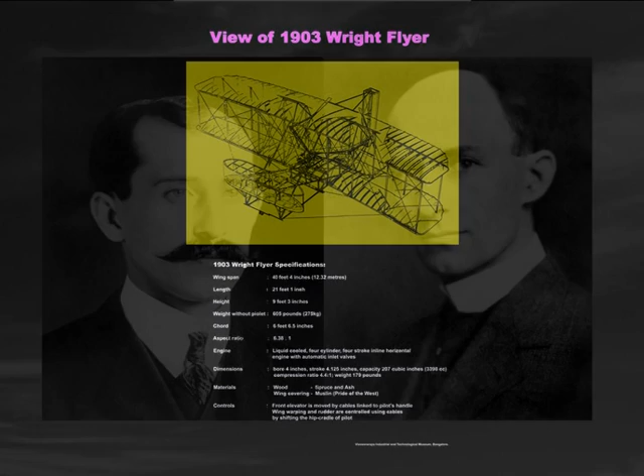Wilbur Wright and Orville Wright, two brothers, were ready to test their heavier-than-air plane, the Flyer, on this momentous day. It was the first powered airplane that would attempt to fly under the control of a pilot, who was to lie on his stomach as he steered the flight. Would it fly? Would it not?

It was a windy day in North Carolina. At 10:35 in the morning, the Flyer rose. It went up to 120 feet and flew for 12 seconds. With these 12 seconds, the Wright brothers had fulfilled man's desire to fly. It was the first controlled, mechanical, and powered flight.

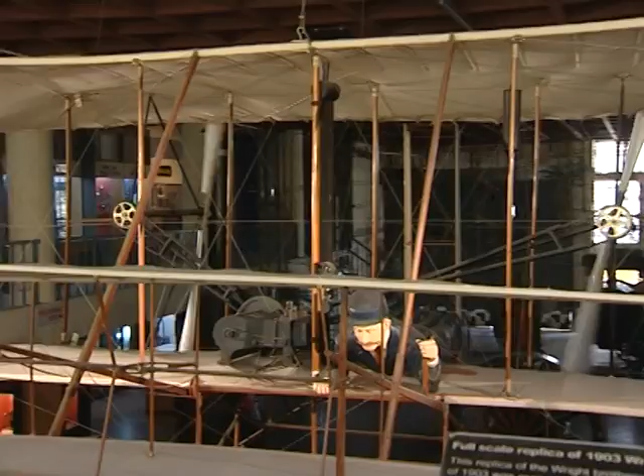100 years later, in 2003, the Visvesvaraya Industrial and Technological Museum in Bengaluru unveiled a full-scale replica of the Flyer. Displayed at the Engine Hall, this is the only one of its kind in the country. It's a piece of history, a display that fascinates and takes one back in time. Everything in the model is authentic.

A 15-member team worked for 9 long months to craft this masterpiece. The Wright Flyer had been handmade by the Wright brothers. In its simplicity lay the biggest challenge.

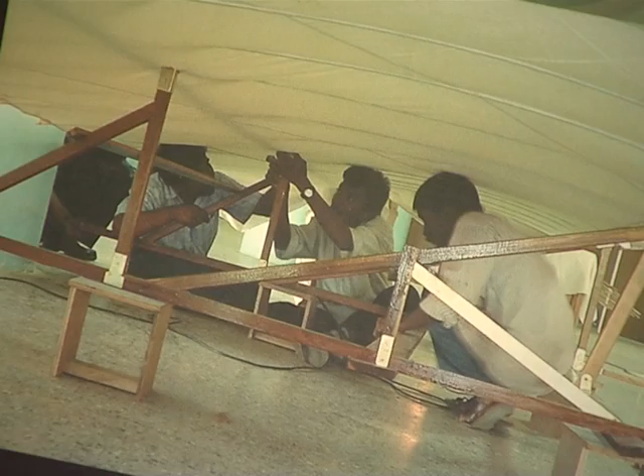60 cubic feet of wood, 400 meters of steel wire, and 170 meters of cloth was used. All material as close as possible to the original, except the engine. A set of 50 authentic drawings from the Smithsonian Institute guided the venture, drawings that had been made after dismantling the original Flyer. The National Aerospace Laboratories, Bengaluru, provided the technical guidance.

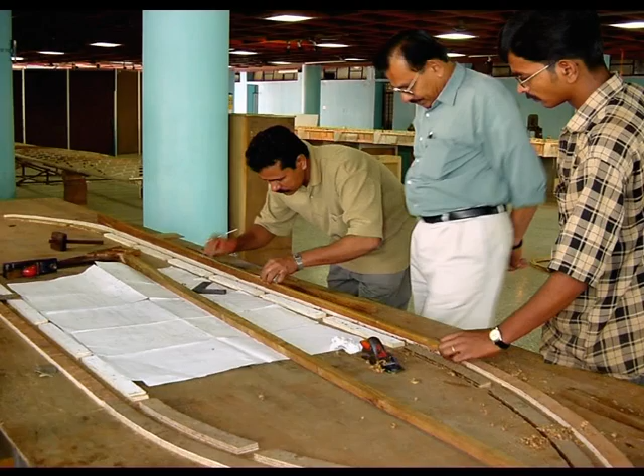The Flyer replica is a tribute to the Wright brothers. VITM presents the story of the Wright brothers, the story of perseverance and brilliance, the story of an invention that changed our world. Here is the story and the history of flight.

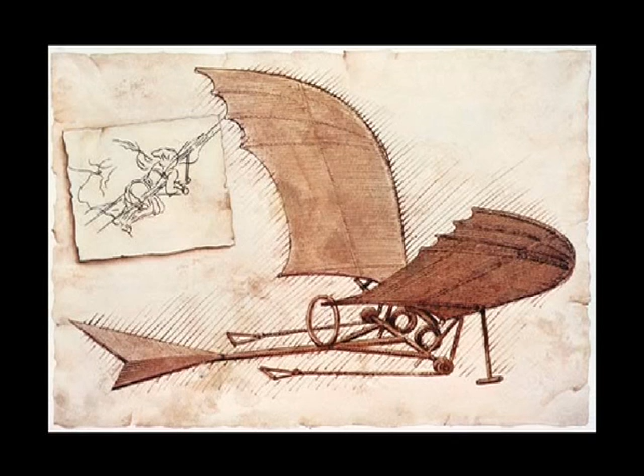Some 500 years ago, 15th century artist and inventor Leonardo da Vinci sketched his flying machine, the Ornithopter. Leonardo thought of birds as machines that operated according to mathematical law. He believed that whatever occurs in nature can also occur in technology. The bird-like wing-flapping aircraft was never tested.

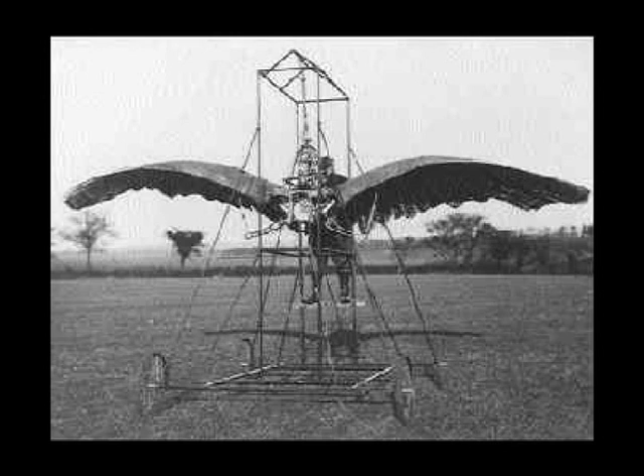Manned flight continued to fascinate, but it evaded man. Kites led to balloons. They could float in the air, even carry weight, but they were balloons, rooted to the ground. Experiments continued. Gliders followed.

George Cayley, a British inventor, designed the first ever model glider. But gliders lacked power. They glided from the top to the bottom.

In Germany lived an exemplary innovator. Otto Lilienthal dreamt of flight too. He believed to invent an airplane is nothing. To build one is something, but to fly is everything.

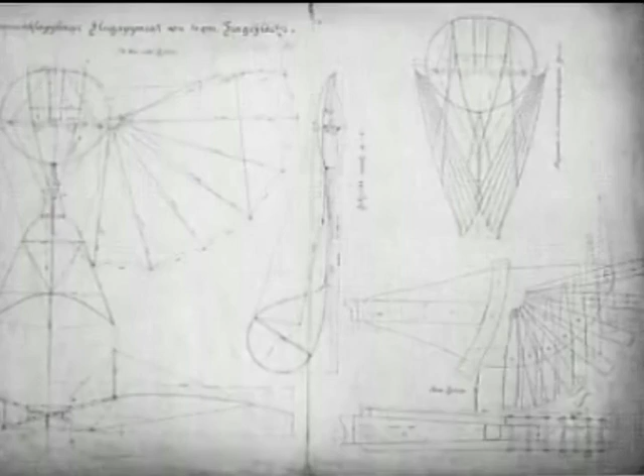Otto Lilienthal started working on gliders systematically. He was able to make sustained and replicable flights for the first time in history. He devised 18 different designs of gliders in a short span of 5 years. 15 were monoplanes and 3 biplanes. He went on to become the first man to launch himself into air, fly, and land safely.

Lilienthal's contribution to flight was exemplary. He died in an accidental crash, but he did 2 important things. He proved that the mastery of flight should first be in gliders. And secondly, he became the inspiration for the Wright brothers.

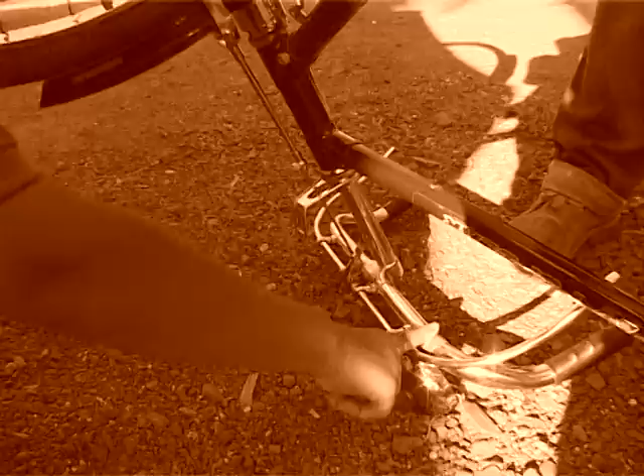The Wright brothers in America shared his dream of flight. They learned from his successes and failures. They had a mechanical bent of mind. They were also very curious. The brothers were a good team.

They flew kites like all children their age, but unlike others, they keenly observed them, learnt from them, even designed them. They delighted in the flight of birds. Why, you may ask? Why fly? Only because of one simple reason. The gift. It could actually fly.

When the Wright brothers were little boys, their father gifted them a toy that could fly in the air. It fascinated them. It was the toy that fired their imagination. They called their father's gift the bat. Powered by a rubber band, the little toy flew. The brothers reasoned, if this can fly, so can an improved, heavier design. Their dream was born.

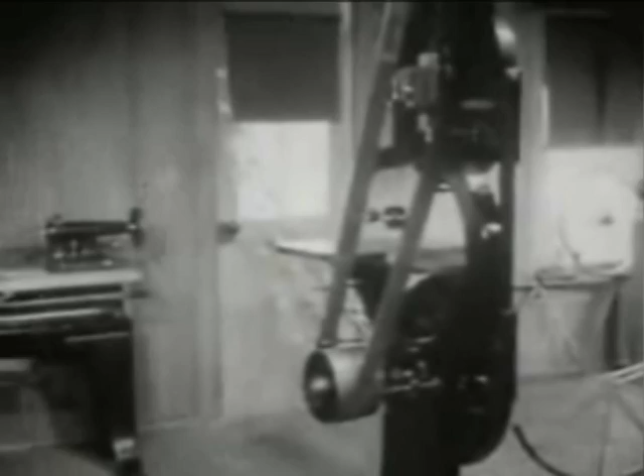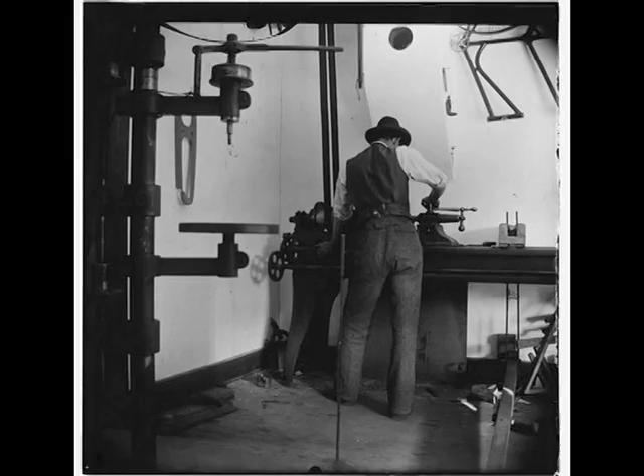Inspired and motivated by the work of Otto Lilienthal, the Wright brothers started understanding aerodynamics. They worked in their bicycle factory, made it into a workshop, studied wing shapes. They mastered aerodynamics. The Wright brothers understood the airfoil afresh.

How it curved like a bird's wing. Wasn't that nature's perfect design to create the upward force? So what's special about this shape? The airfoil makes the wind flow faster on top, causing an upward force, lift. There is an added lift due to the air deflected downward. Both these forces together provide the lift required to rise and float in air.

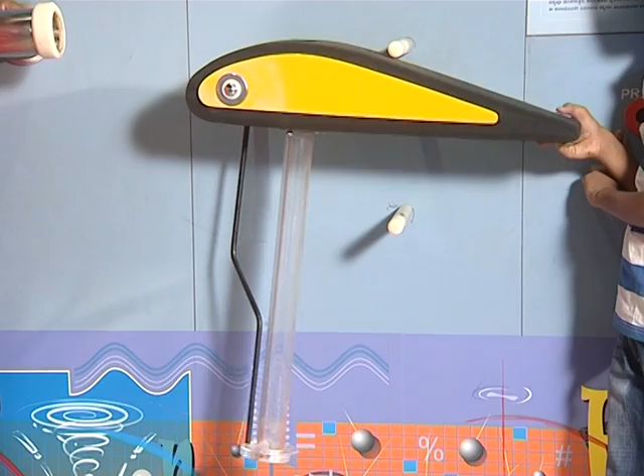Have a look at the airfoil shaped wing. Air flows from a pipe onto the wing. Watch the ball. It climbs due to a low pressure created by the faster airflow on top. Block the flow and the ball drops. The Wright brothers had understood the aerodynamic forces on curved surfaces, the forces that could make their dream come true.

They approached flight with 3 clear goals. Lift, to make the heavier than air plane rise. Control, the ability to steer and direct. And thrust, the power to make it move ahead.

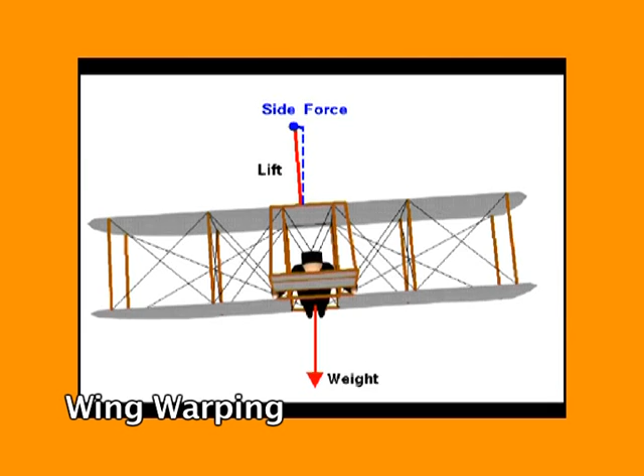It was a 5-foot box kite shaped like a biplane, a glider that could be flown as a kite. The Wrights wanted to master lift, balance and control. They wanted to understand the effect of wing warping. Warping means twisting. The Wright brothers understood that when the wings were twisted or warped, the glider could turn. They understood that the lift force on the wings could be changed by lowering or raising them. The glider, they noticed, turned in the direction of the lower end.

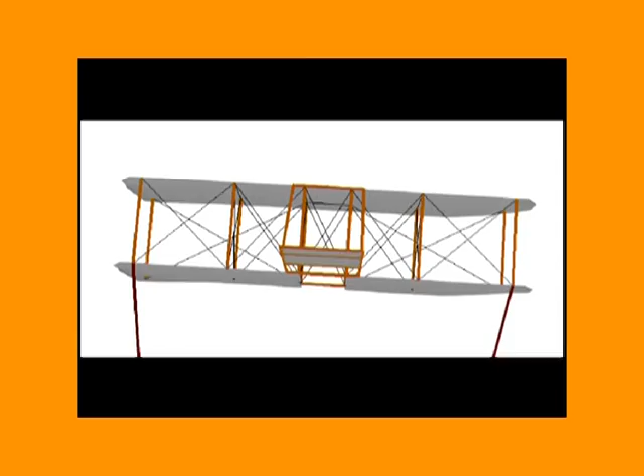It was something like this. Notice how the parasailer controls his flight. He directs it by pulling the strings attached to the sails. When he pulls right, he turns right towards the lower end.

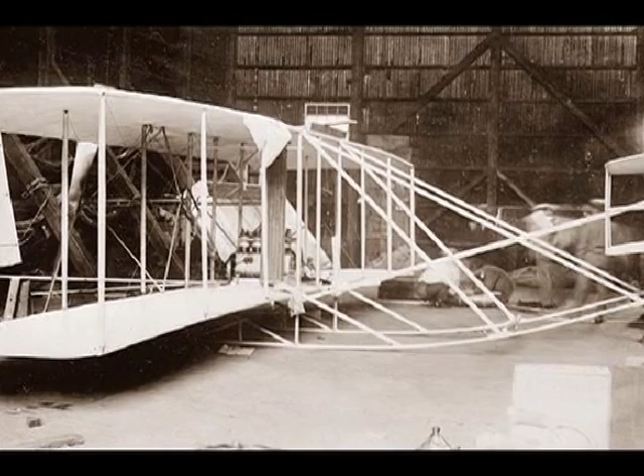The Wright brothers understood lift and warping with their box kite. They grasped, faster the wind movement, greater the lift.

Something that we can understand with a simple model. A string through a straw to give it free movement. A wing-shaped airfoil made with card paper. And a hairdryer for airflow. Notice how the wing remains suspended in air. It has lift strong enough to defy gravity.

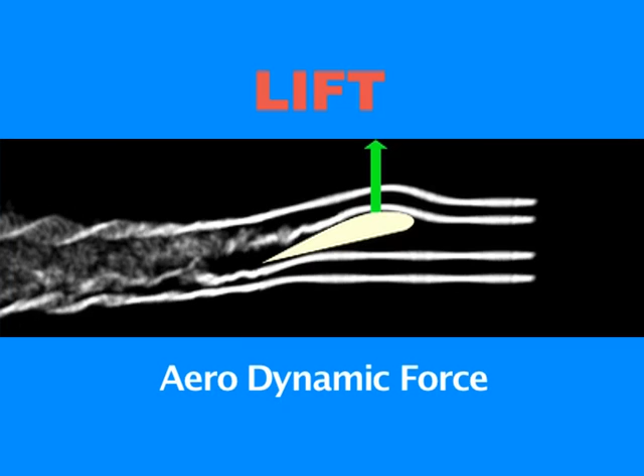Lift is an aerodynamic force. Aero means air. Dynamic is motion. The airflow above the curved surface of the wing is faster than the air moving below. This causes a lower pressure above the surface. The result is an upward force. At the same time, the air deflected down by the curved surface also causes an upward force. Both these forces together contribute to the lift.

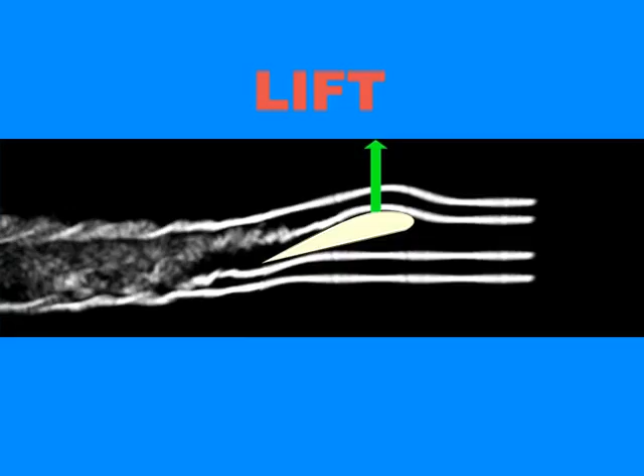The Wright brothers understood that the shape of the wing determined the amount of lift. The greater the speed, bigger the lift. With these lessons, Orville and Wilbur took to designing their glider. Wilbur wrote, "Flight is possible to man. I feel it'll soon cost me an increased amount of money, if not my life."

It was an ambitious and bold decision, something that could have indeed killed them. The brothers started work towards manned flight: a glider, 17 feet wingspan, 50 pounds, braced with wire. A biplane with a wing warping control system, designed to carry a man.

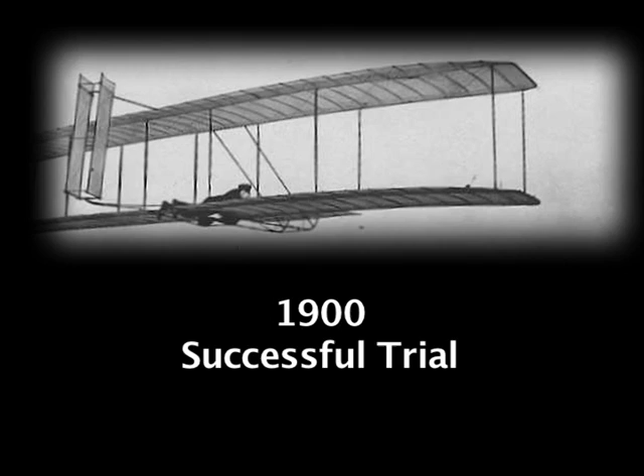The glider was tested at Kitty Hawk, a perfect location: windy, isolated, hilly. Based upon the results, the Wright brothers took to refining controls and landing gear. They built a bigger glider, the largest glider ever flown till then, but all did not go well. The lift was way below their expectation, and the control was poor. It was a failed attempt.

The Wright brothers renewed their effort. They worked like true scientists, becoming the first ones to test the force of lift in a wind tunnel. It was a busy year. They finalized design, experimented, innovated. They tested their glider again and again, and overcame the issue of lift. With their first goal met, it was time to tackle control.

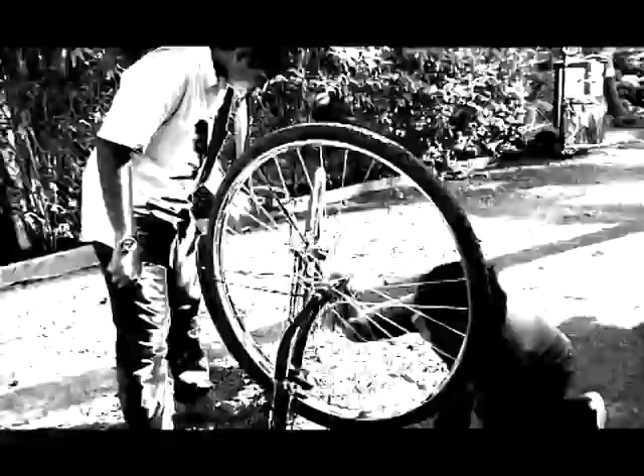It's funny but true that this very activity helped the Wright brothers in making their flyer. They applied the knowledge of cycling to flying. A bicycle is intrinsically unstable; its control and balance lie with the person riding it.

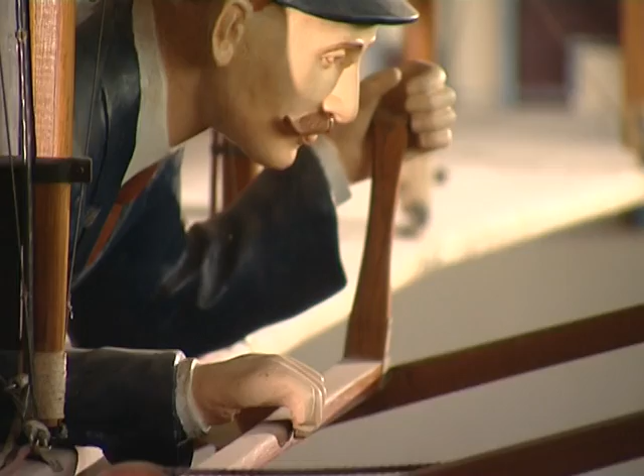Earlier airplane designers had imagined a plane as a flying boat, floating in an ocean of air, something that would be able to right itself when rocked. The Wright brothers thought afresh. They saw the person in flight as a bicycle rider who would work to keep the plane steady with strings attached to his body. The movement of his hips could change the shape of the flexible wings and the rudder. It worked: a front elevator to control up and down, and a rudder for left and right.

Goal 2 achieved, they turned to thrust: an engine and a propeller to sustain flight. They needed a mechanism to increase the speed of air over the wings of the plane.

Windmills were already in use then, and propellers were being used by ships. The Wright brothers understood propellers afresh, thinking of them like wings spinning in the air.

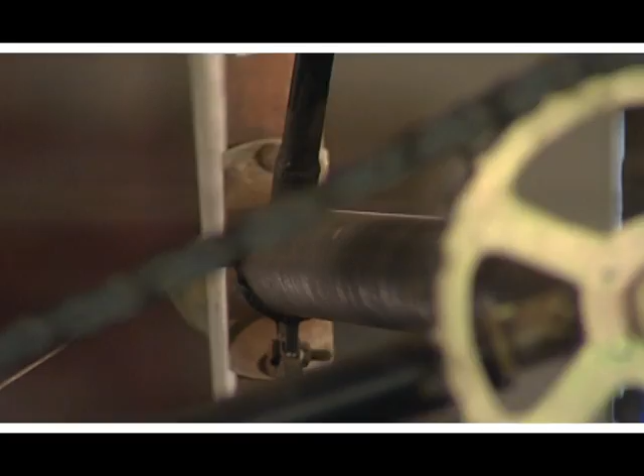For power, they turned to the bicycle factory again. They themselves designed a simple, lightweight, petrol-run, 4-cylinder engine, especially for the flyer. And so they had lift, control, and thrust.

Thus evolved the 3-axis control. Success assured, is what they said: 3-axis control, 3-axis control, 3-axis control.

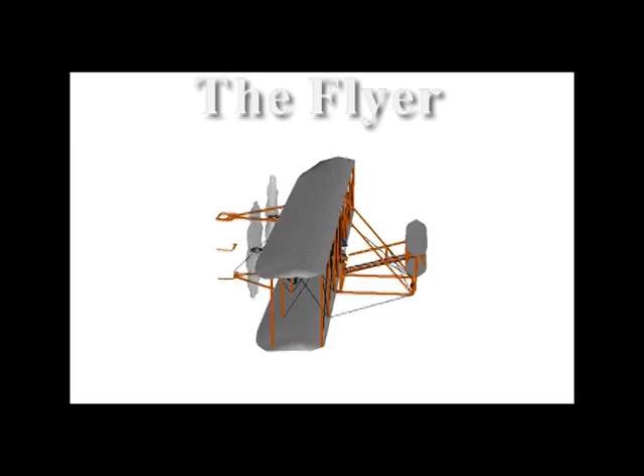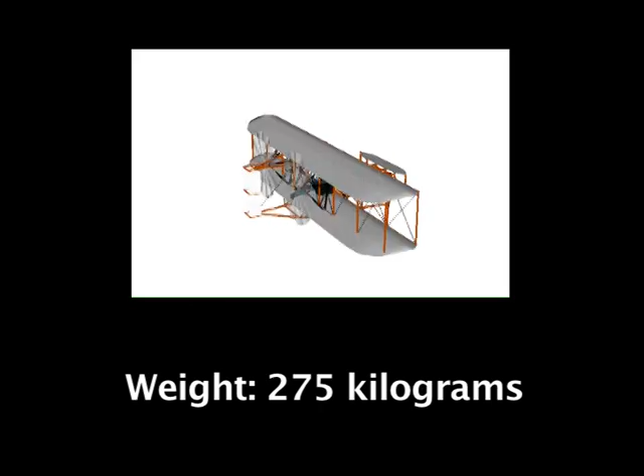And then came the historic day: 17 December 1903. The flyer was ready to be tested. A movable wooden track gave the aircraft enough speed to fly. The propeller sprang to life, and it lifted off.

This is how the flyer wrote history. Orville had won the toss of the coin and got the first chance as pilot. The flyer flew for 12 seconds. This was the first ever successful, powered, piloted, heavier-than-air flight in history. The brothers flew four times that same day, a total of 98 seconds.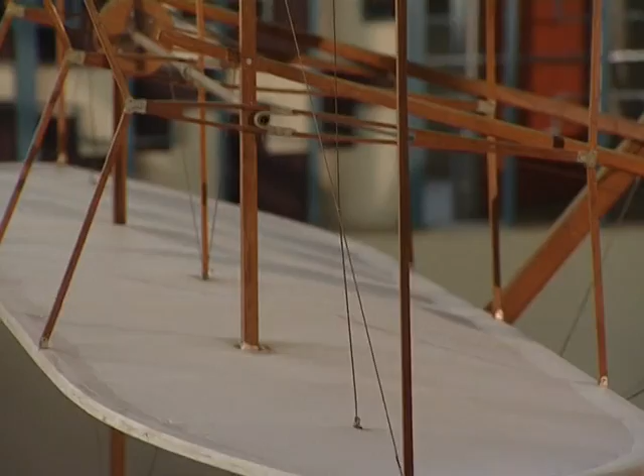The flyer paved the way for all future flights. So every time you see a plane take off, remember the science.

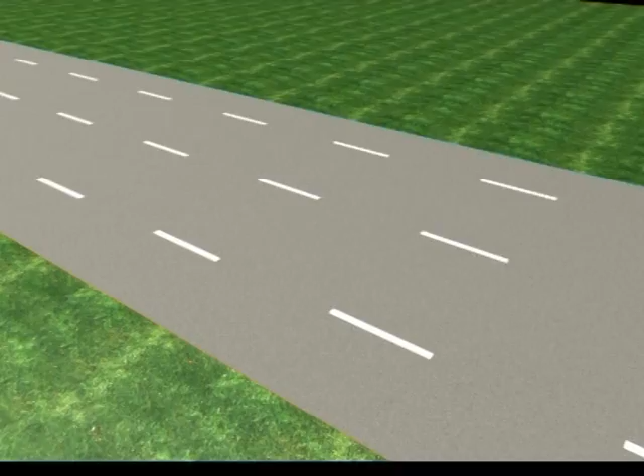The craft gained speed, forcing air to move over the wings at a higher speed and deflecting air downward under the wing. The nose of the plane tips, the angle of attack changes, and lift increases. It's strong enough for takeoff, the downward tug of gravity now weaker than the force lifting it.

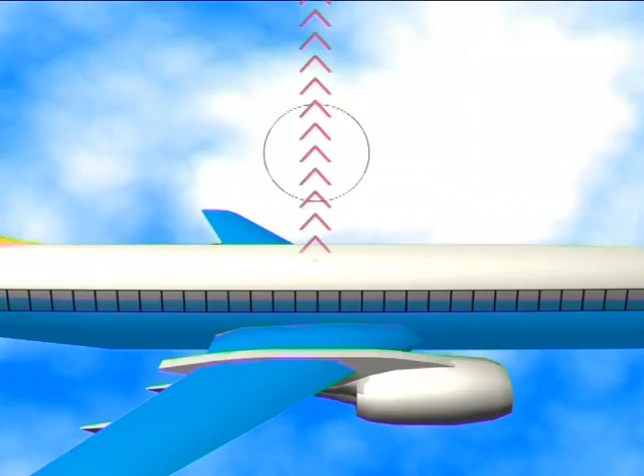The plane cruises at a high speed, high enough to maintain the lift. But it needs to surge ahead; it needs to overcome the drag of the air holding it back. The powerful engine gives it a thrust, and it surges ahead. This interplay...